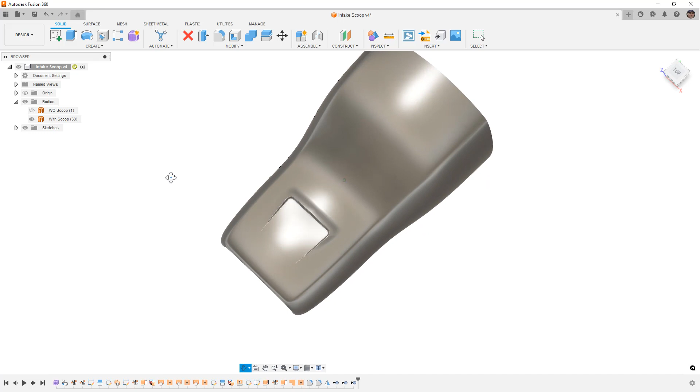There are a few things that we need to understand, some challenges that we're going to run into, but overall we want to talk about the process of creating this scoop, which takes the original geometry and creates a section that dips down into it as well as bumps up and away from it.

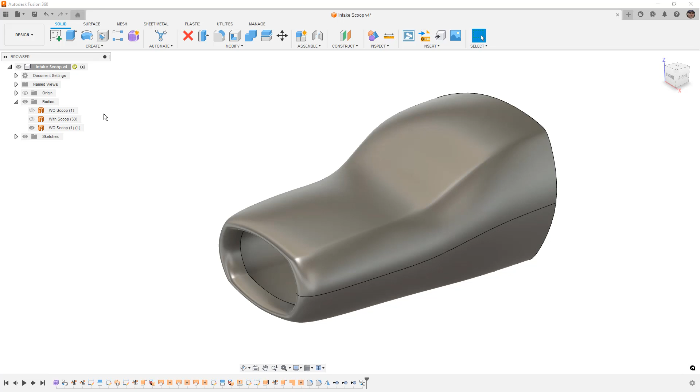For this example, I'm going to go to my surfacing tools and start with my trim tool. I'm going to use the XZ plane and trim away the bottom of the design. This is going to leave just the top.

The reason I do this is because now when we're doing things like trimming or splitting faces, it's not dealing with the top and the bottom of the surface. We're only dealing with the top.

Now, as I mentioned, generally I like to work with symmetry. However, that unfortunately is a problem with Fusion 360 because as we create lofts or patches and use tangency or curvature continuity, I've noticed there's an inconsistency in those internal surfaces.

So for this design, what we're going to do is work with the entire design, drawing half the sketch and mirroring the sketch rather than mirroring the surfaces.

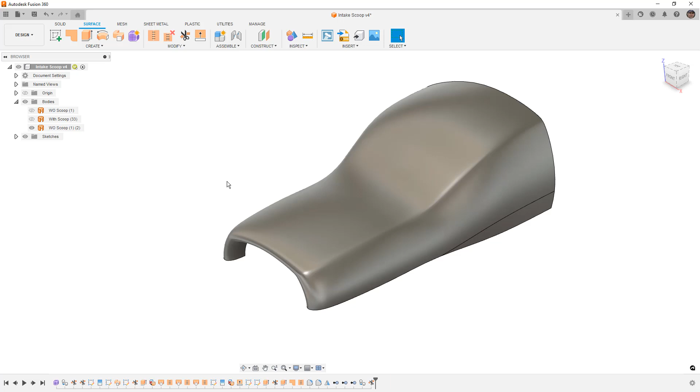To get started, we're going to go to our top plane and start our sketch. I'm going to use a line tool coming from the origin and up, then create a secondary line here, hit escape, and turn this one into construction using X on the keyboard.

Now what we're going to do is create a different version than the one I showed you here. We're going to make our own version, maybe with some slight differences, and try to get the best possible surface out of this.

So the first thing we need to decide or understand is whether we're going to use straight lines, or arcs, or splines, or something else. It's definitely much easier for us to use straight lines for this example, so that's what I'm going to do.

But note that curvature with straight lines is oftentimes tricky, so it might cause problems downstream to use all straight lines and fillets, but we're going to use that as the basis just to speed things along.

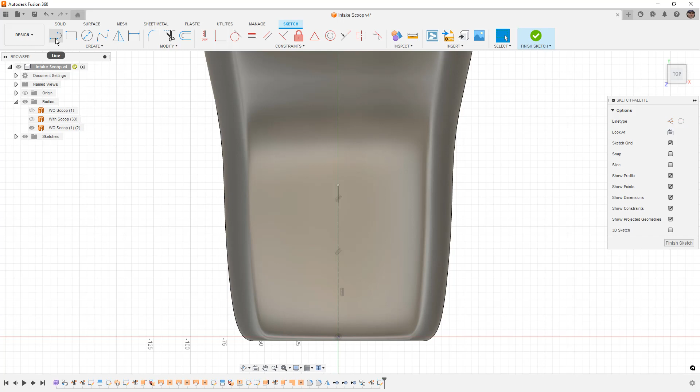So I'm going to draw out and to the left and begin creating the shape for my design. I'm going to make this horizontal, then come up and back over to here. I'll hit escape, and make sure this line is horizontal, making sure those two are parallel, and then we can begin to manipulate the shape however we need.

Now, another interesting thing that we need to think about is the fact that we don't necessarily want to come to a point right here.

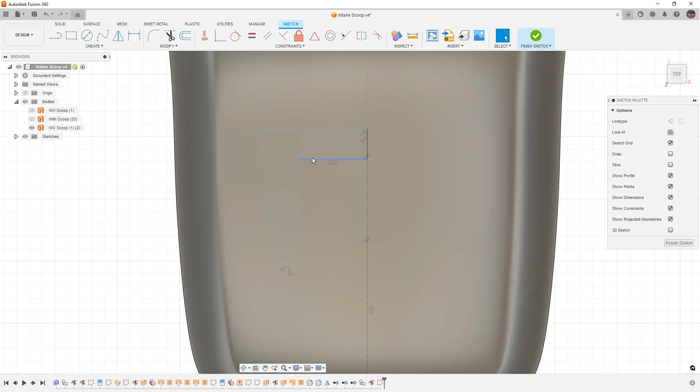That's going to cause problems when we try to blend surfaces together and create fillets. So oftentimes you'll see some of these things offset inward and outward. Because it can get tricky with our surface, I'm going to turn that off or hide it for now.

I'm going to go ahead and create a horizontal line here. This is going to allow us to split the inside section that we're going to be building, the section that goes down into our fuselage.

Before we get too much further, we want to round these corners off. Now we can do this with conics, which I've talked about before. I'm going to do this the simple way with fillets, not the ideal way. I'd generally use something a little better like a spline or a conic, but I'm trying to keep this as simple as possible without complicating it too much beyond the surfacing tools.

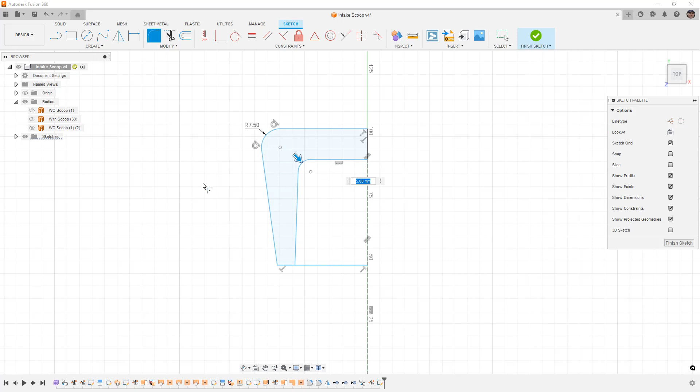Once we have those fillets, now we can use our mirror tool. We're going to select all the entities that we want to mirror, and we'll pick our mirror line. Now we've got essentially the outline of our intake, or our scoop.

So the next thing we're going to do is figure out where we want this to end up, because we're going to blend everything together.

I'm just going to come over a little bit, in and over horizontally. Then once again use my fillet, trying to keep these roughly concentric. We could go the extra step making both of these concentric, but it's really not that important at this point, honestly—we're just doing this visually. So as long as it looks okay, that's fine for what I want to do.

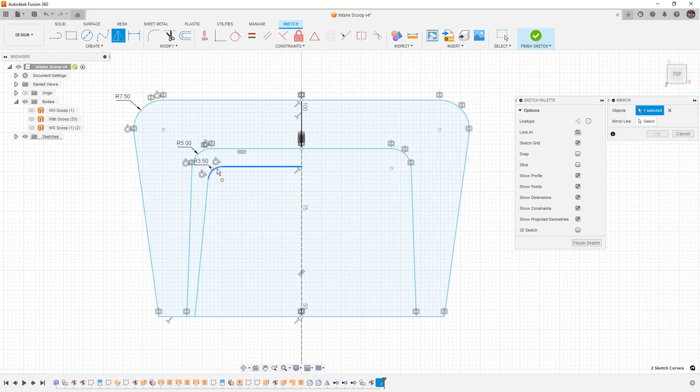Once again we'll just pick our center mirror line. This is going to represent the section that's bumped up and away from the current surface, and this is the section that is down and below. Then we need to build in between these curves.

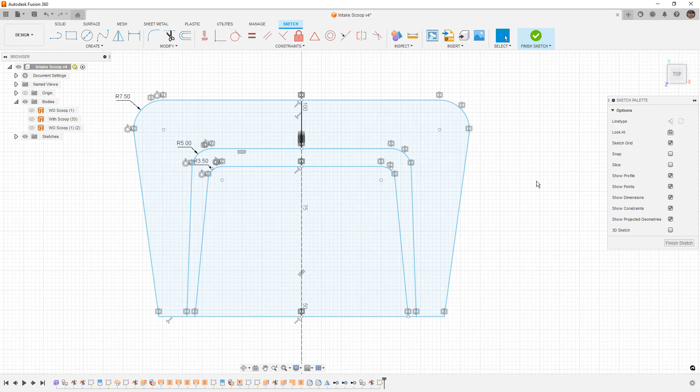This is an important step in the process, to figure out what you want your design to look like in 2D, whether it's from the side, the top, or the front. Having these references is really going to help.

The first thing I want to do is use this as a split tool to split the face. Now this is going to get a little tricky because of the number of references we have here, so we might need to hold down the Shift key and try to select multiples. You'll notice it's not allowing us to go across this midline and make that selection.

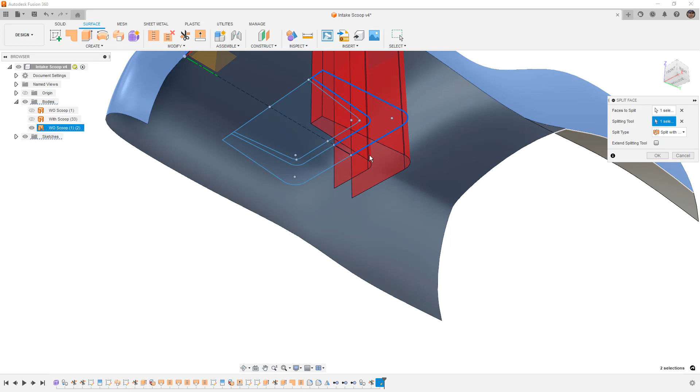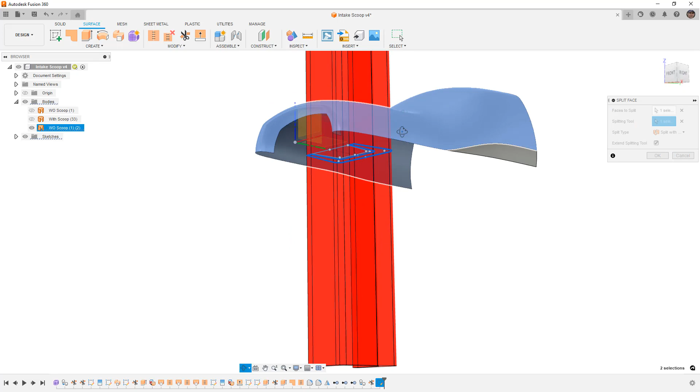If that's the case, let's turn off Extend Splitting Tool and see if it'll allow us to do it. If not, we should go back to our sketch, pick this line here, and turn that into construction as well. That allows us to carry on the tangency whenever we make those selections. For example, now we should be able to go around and make all these selections to get the full closed path. So if you find you're having trouble making those selections, go back and make adjustments to your sketch, and see if removing or changing some of the geometry to construction can help.

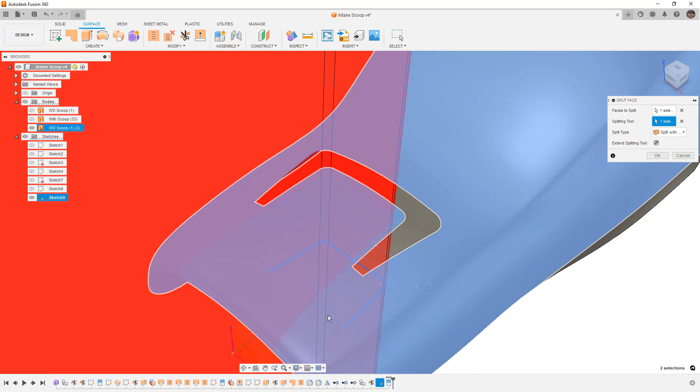The next thing I want to do is repeat that, splitting the inside. This time I want to use these inside curves, and I'm also going to try to carry this over. Let's see if we can make this selection.

This selection isn't going to work simply because we don't have that straight line. So I'm going to cancel the split tool and use these straight lines instead. The reason is because those straight lines will allow us to come all the way to here. Now, if it happens to cut the entire surface body, that doesn't necessarily mean there's a problem, but you can toggle off Extend. And because they do end at the same vertex on each side, it'll just stop at that point.

We're going to repeat this one more time: Modify, Split Face, split this inside face, and now our splitting tool is going to be these inside sections.

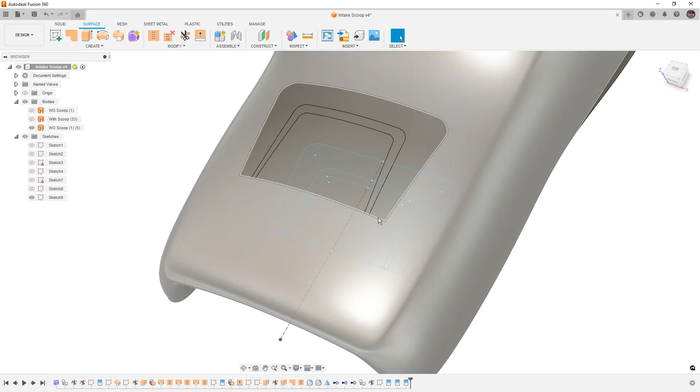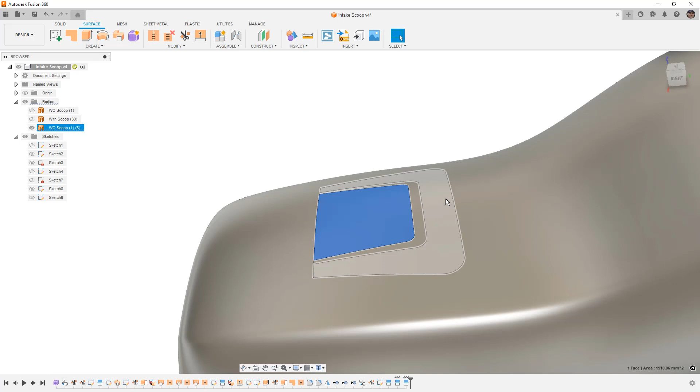Again, you can turn off Extend because all of the sketches intersect at the right places. Now this gets a little bit interesting, simply based on the fact that we need to go up from here and down from here, and these are just in between references. We're going to use these references when we build things out in 3D, and I'll get started by defining the section that is going to bump up from here.

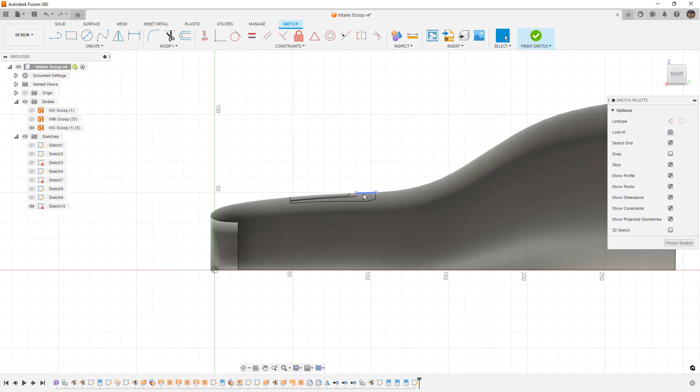To do that, we're going to create a sketch on our midplane here, and I'm going to use Slice, which will allow us to see through the surface. Because we don't have an edge here, we need to use Create, Project Include, and Intersect. We're going to intersect with that section of our sketch or surface, then use our Line tool to come up vertically, and then use a Spline tool to go from this endpoint to this one here.

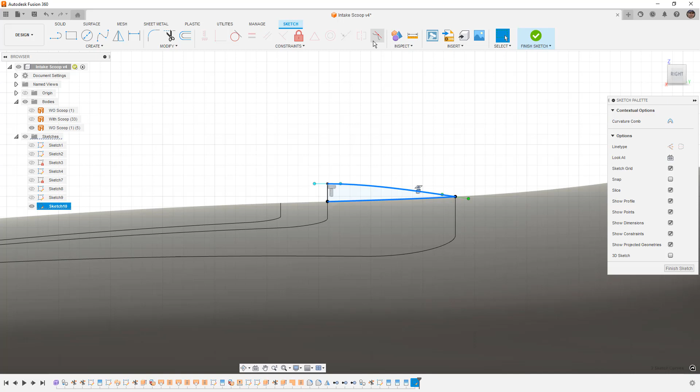From here, we need to talk about the differences between using tangency and curvature continuity. So we're going to make this one horizontal here, and bring it down. When we talk about these two entities, the intersection curve as well as our spline, we have the ability to add a G2 or curvature continuity, which adds a tangency direction to the handle, but also a weight based on the radius of curvature of our surrounding surface.

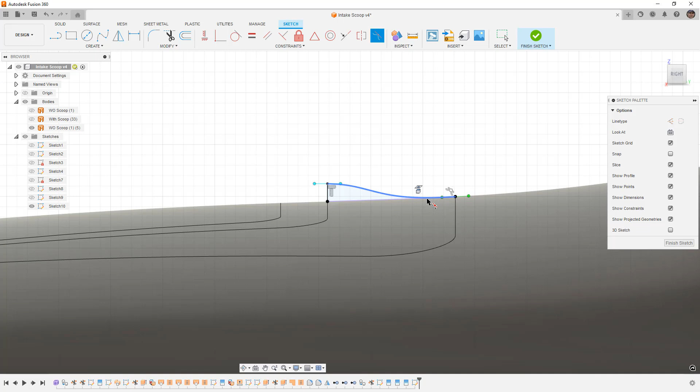If we just do a tangency, it's only going to pick the direction that the surface is going and not add a weight to it. So if we use curvature, it's potentially going to drive this a bit further forward because this radius right here is going to match the radius as it's coming into that point.

That's as much as we can do with Fusion. There's no G3 continuity because it's not really a Class A surfacing tool. So we can use G2, the curvature constraint, or G1, the tangent constraint. G0 would be our coincident constraint, which we have just by simply snapping to those endpoints.

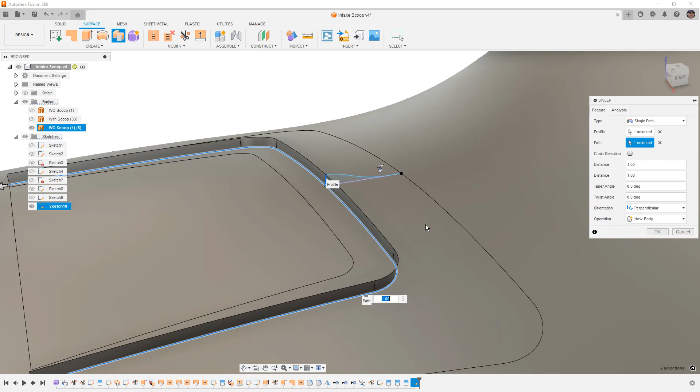So this sketch is going to be used to take this vertical line and we're going to sweep this around this path. Now, when we use sweep, there are a couple things we need to be aware of. The sweep tool does not have end conditions, so we can't drive it with tangency or curvature continuity.

So using a sweep as a surface tool actually produces a really nice surface, but it has to be done very early in your design. Because you can't drive it with tangency, you need to make sure you're careful with when you use it and how you use it.

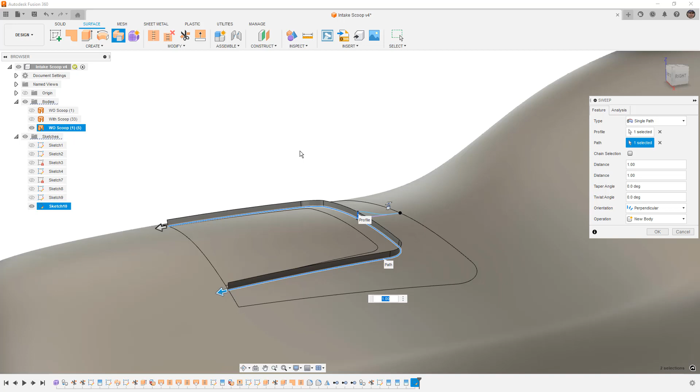In our case, it's fine simply because the curve we had was on the midline, basically our mirror or symmetry line for this body, which means the sweep is going out normal or perpendicular to that sketch plane. That's perfectly fine because we're on the mirror line. You can see there's no line in the middle of that sweep, so in our case, it works.

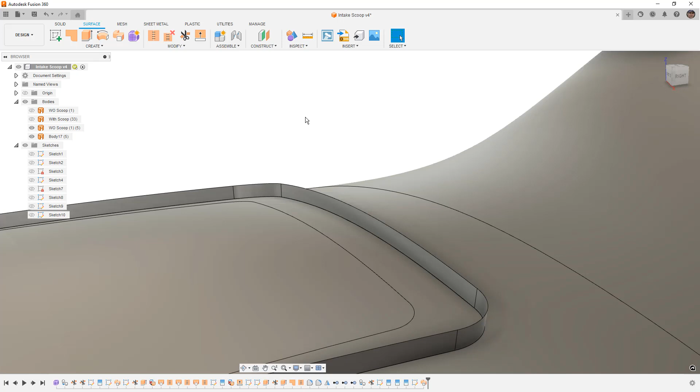Again, this is an early on kind of thing, something we want to do very early in our design. The next thing we need to do with the sweep is trim it so that it blends smoothly into this front edge.

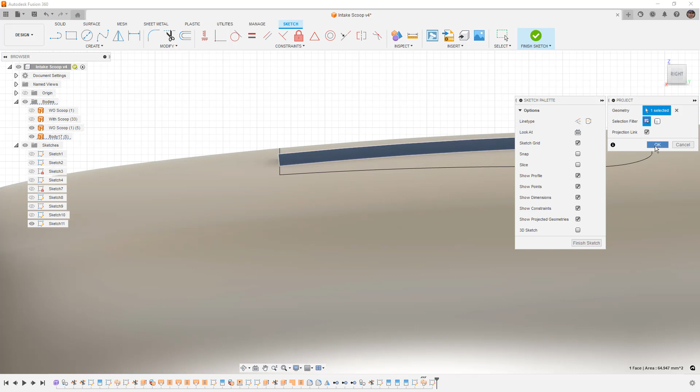And we're going to do that with a sketch, again on the side plane. I'm going to take this and hit P on the keyboard to project. Then we'll use a spline. I'm keeping everything relatively simple, not spending a lot of time defining these curves. I'm going to use tangency here and tangency at the top.

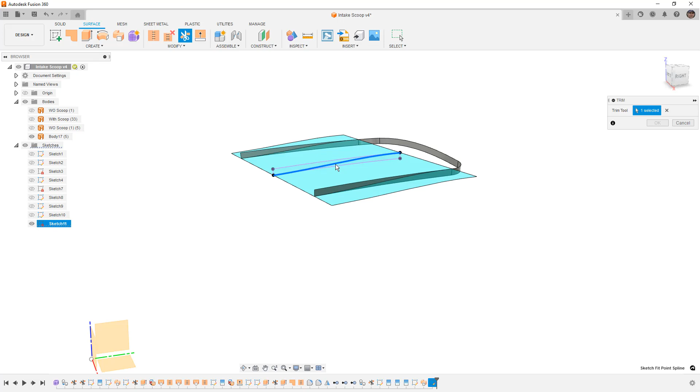Then we're going to hide the body without scoop just so we show our sweep only. We'll use our trim, select that spline we created, and get rid of the top section of both of those. Hide our sketch, and we'll bring our surface back.

So when we do this, essentially what we're doing is building out a cage or a control for how we want the shape to be built. Remember, we put that line in the center, we built out this curve here, and that's going to help us drive the shape.

So at this point, this is where things start to get a little bit tricky for us in defining these surfaces. We have a couple of tools that we can use.

We could use patch, we could use loft, and those are really the two main tools that we can use to build these. There are some problems with each of these. Loft can do a relatively good job. For example, if we're just lofting between here and here, and we're using this spline as a guide or an interior rail, that can produce a good result, especially if we start driving these using tangency.

But the place where Fusion starts to hang up on this is at these edges. Even if we change these from free edges to align to surface, what ends up happening is as we build out the rest of the surface with this tool, it really starts to hang up. And then the continuity that ends up happening in those corners is just not good surface.

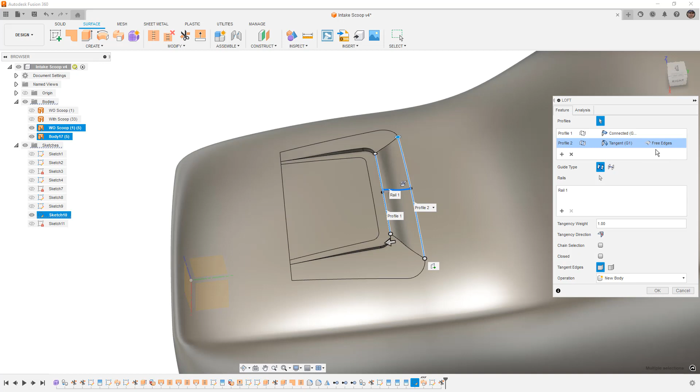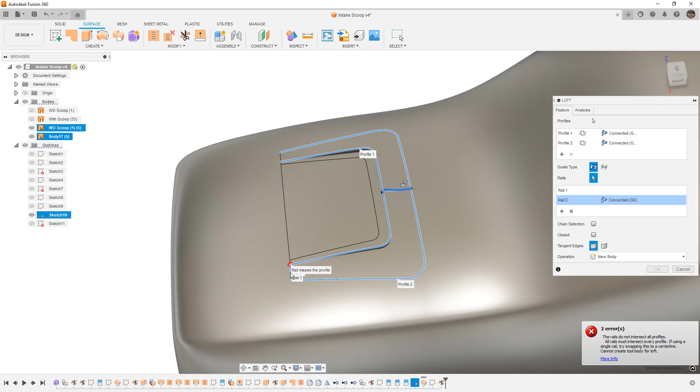So you might also be thinking to yourself, well, why don't we just drive this all the way around? We have 4 sides. We can just carry this all the way around. We'll add another profile. We'll do the same thing over here. It's going to give us some errors until we fill in the rest of it. Then we can use our rails at the end and we can drive the continuity.

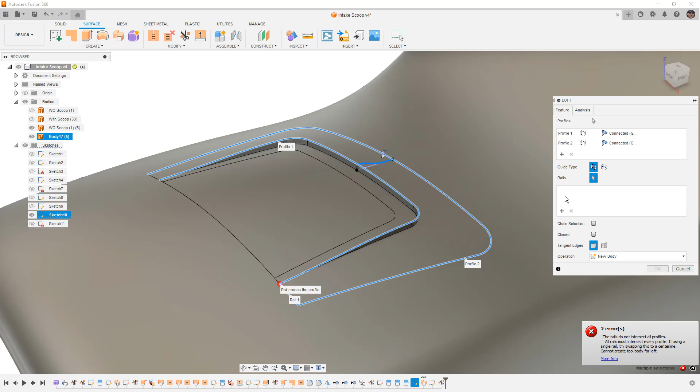But you can see we're starting to see some problems. Even though we trimmed that right to the end, it's looking like there is a slight discontinuity here from the trim and our surface. So that's going to cause a problem. Sometimes these minor disconnects or discontinuities can be fixed with a patch tool. In some cases, they can't be fixed, and we might just need to get rid of those rails, and that's perfectly fine. That might be a valid option.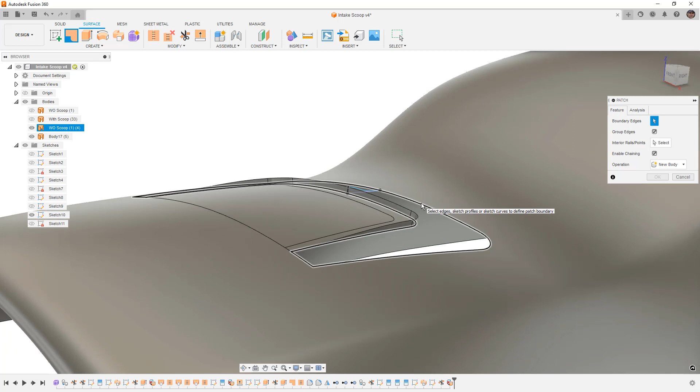However, I also have noticed that as the loft goes around this corner, it has a much harder time controlling that shape. So what we're going to do is we're going to select this face and hit delete. Then we're going to try to use the patch tool using enable chaining. And notice when we enable chaining, it's grabbing the bottom edge because we haven't stitched these together. So let's do a quick stitch, put those and these together.

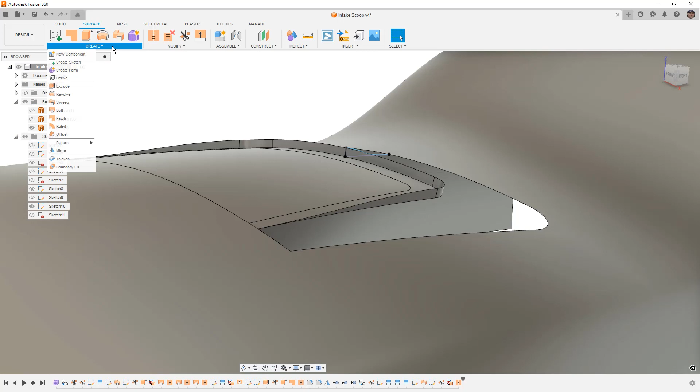And you'll notice that these green edges are going to represent essentially the areas where these two surfaces will be connected. Depending on the tolerance and the distance between those points, we might now have a single point and it might be a valid solution for a loft. So let's just give it a try real quick between these two edges. And let's select this. Now you can still see the rail is missing a point. If we zoom in really far, we might be able to grab it. But again, these are the sort of problems that we're going to run into.

So let's try to use a patch. And on the patch, we don't want to group the edges together. We do want to use an interior rail. And you'll notice when we do this, it automatically grabs the entire closed profile. It doesn't allow us to just grab that upper section, which is obviously problematic because we only want that upper section. So we need to kind of move the mouse around and see if it'll allow us to grab it. In this case, it doesn't, but that's probably okay because we're driving this based on curvature.

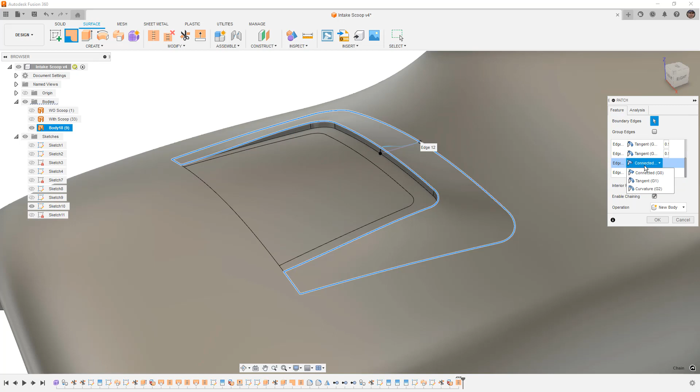However, we need to figure out which edges we can use tangency on. So as we move our way around, you can see each one is being shown on screen. Edge 3 will be connected, edge 4 will be connected, edge 5 connected, 6 connected, 7, 8. Once we get back around to 9, now we can drive this with tangency. 10, tangency. 11 is going to have tangency. 12, tangency. And 13, tangency.

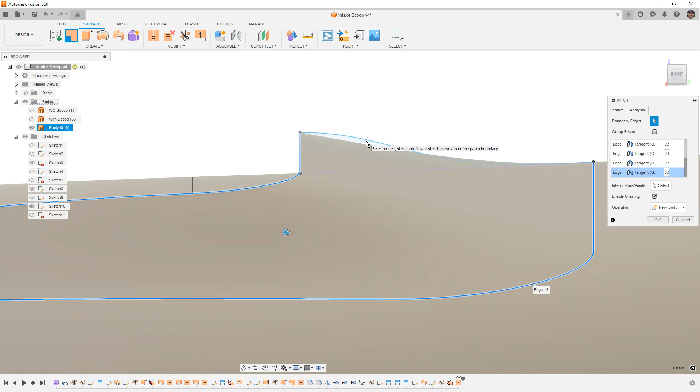So you can see we got a fairly smooth result. It's relatively close to the spline we created. The main difference is that our spline had a direction. So in this case, it actually had a horizontal direction. If that is a critical feature in your design, then we really just need to go back and recreate that sketch where this vertical edge here is either non-existent or its construction. Because it is kind of important to the design intent, I'm going to hit cancel. I'm going to create a new sketch.

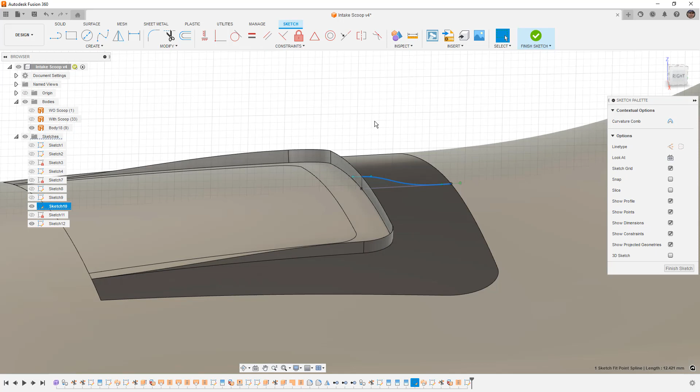And I am just going to project that into my current sketch. So just P on the keyboard, and then I can hide that original, finish the sketch, and I can repeat this process using patch. Now when we use this as our interior rail, it's the only one we can select. We're going to ungroup the edges, and we're going to move our way around, making each of these tangent, except for those interior ones, so edge 3, edge 4, let's just go down until we find edge 9,

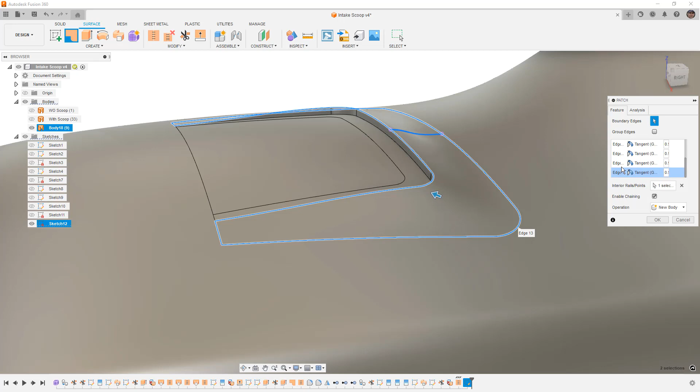10. Another thing to note is by default, when we're using patch, the edge weighting when we use tangent or curvature continuity is going to be set to 0.5, where the default for a loft is going to be set to 1. You can change that. It does get a little tricky when you're using patches, but you can change that. So overall, this looks okay. I can see a little bit of weird shading that's happening right in the middle. That could potentially cause a problem.

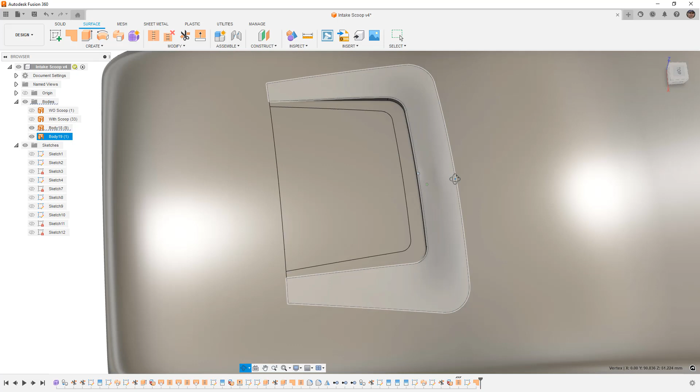You can see there is a vertex here. And part of the reason that vertex is there is because we had a sketch right there. Now, the surface itself doesn't have any splits in it, but that edge right there is introducing some problems into the surface. If we double click on this patch and we clear that midline and we say okay, it's a much smoother result because we're no longer using that to drive the curvature. So that's an important thing that we need to consider.

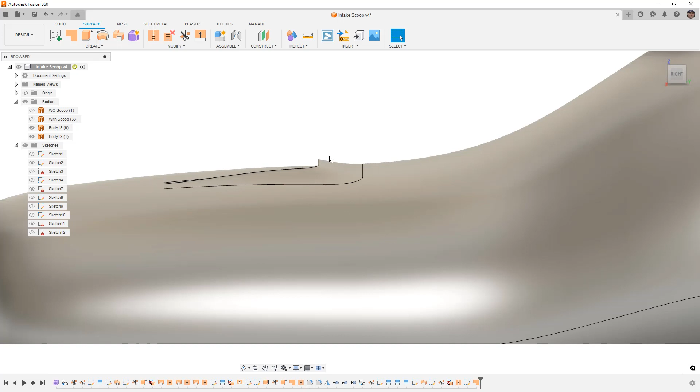Sometimes we need to make these choices or decisions based on the geometry that we're using. So in this case, I'm going to not use that guide, and I'm just going to allow it to sort of taper down a little bit instead of being horizontal there. Because I think that the continuity or the surface quality of the rest of this is much more important than having that little design element.

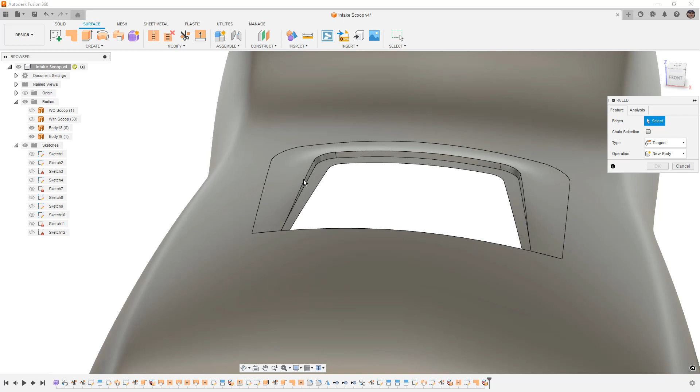The next thing that we need to do is we need to build the surface that's going down from here. So I'm going to delete that. And then I want to use my ruled surface tool. So we're going to come down and find ruled. I'm going to select these inside edges. And I'm going to have this go to a direction. Now the direction is going to be my top plane. And that will allow me to build these surfaces downward. So I'm going to add more edges.

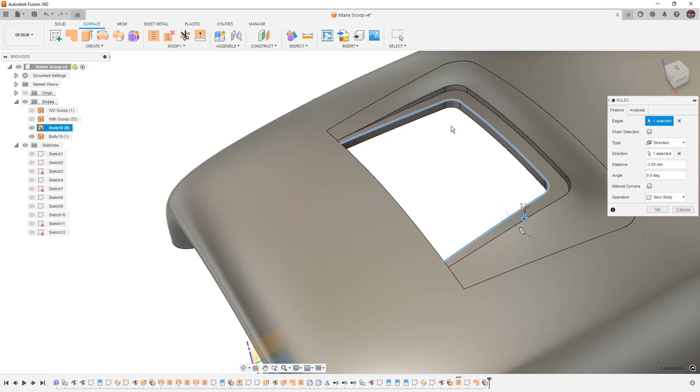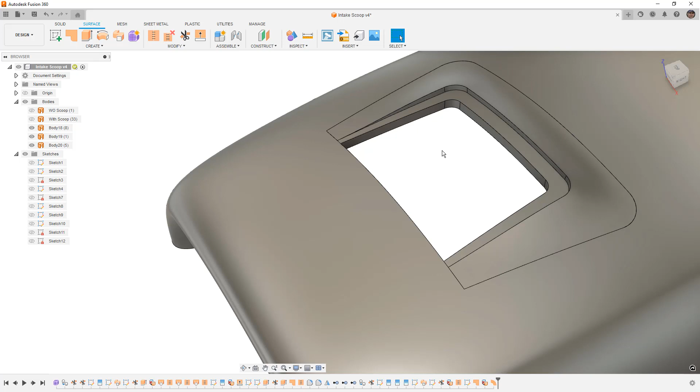And part of the reason I'm doing this is because I want this edge to go down to here. So we're going to say, okay, I want that edge to go down to give me a place for this to sort of live. Now I know that at this corner or this point here, that we're going to end up trimming it back, but we need to figure out a way to blend everything together and get down to that point. So I'm using these edges that we created by splitting things up, using tools like ruled or extend, and allowing us to build out our 3D references relatively easily.

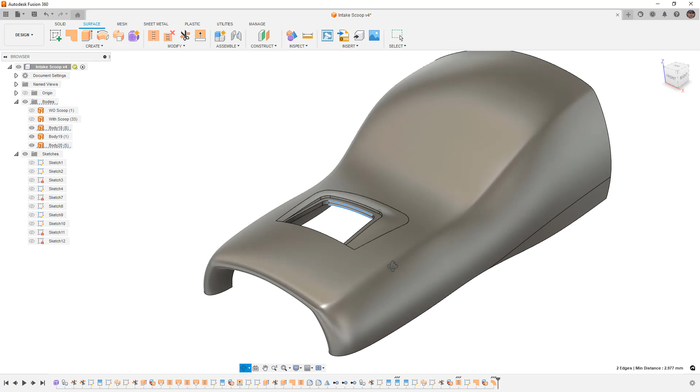Now, part of the reason we did that is because this edge and this edge are offsets of each other, which means that they're nice and consistent width. If we were just to manually push it down, it would likely be flat. And you can see that these match the shape of the rest of the chassis or the fuselage. So let's do another sketch from the side. Let's use slice in our sketch. And we're going to project this inside face, so P on the keyboard.

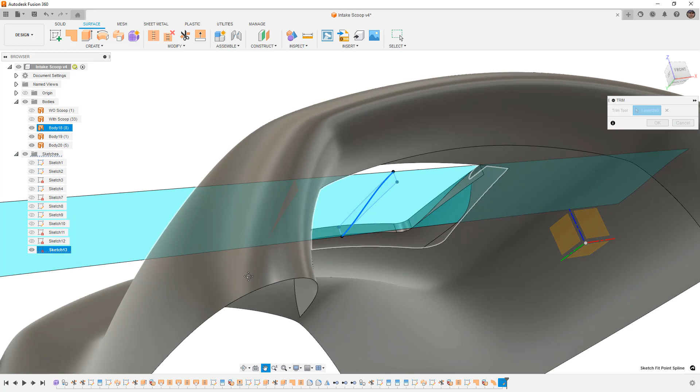And then I also want to use create, actually, you know what? Let's just create a spline here and let's see how this looks. So we'll go from up here to down here. We'll add tangency at the top and tangency at the bottom. And we'll finish the sketch. So what we're going to be doing with that is trimming. Once more, we're going to select that as our trim tool. We'll rotate it around to the bottom, get rid of that little piece, bring this back down, get rid of that little piece, and we'll say OK.

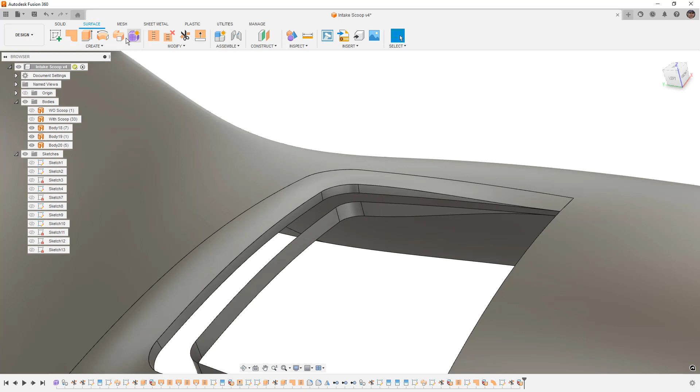So this is going to be essentially a sacrificial surface. It's just temporary because we don't actually need this one here. We can delete that and get rid of it. Because of the split, we're automatically going to have a little bit of an edge there. But what we want to do is we want to build from here down into here. And we can do that with the patch tool. We don't want to use enable chaining.

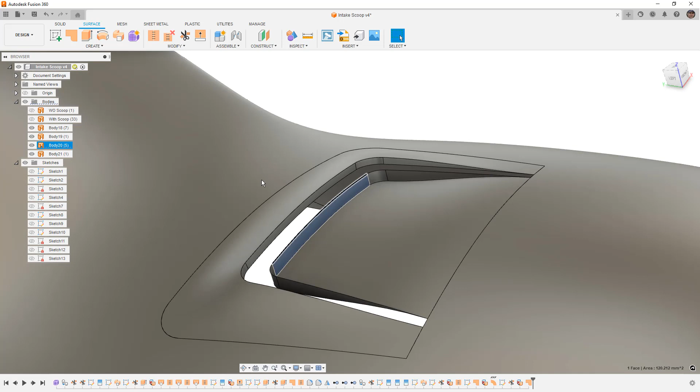We want to manually select these edges, if it'll let us, and work our way around to the bottom. And then edge 4, we're going to have tangency. And then all the rest of the edges, we're going to just allow it to connect. So this surface, we don't need anymore, but this is essentially where we're going down to. And then we're going to fill in the gaps between these. So I'm going to stitch these together for now.

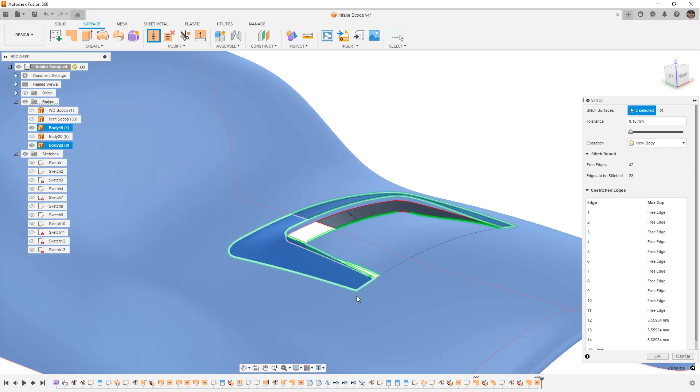Now, you will notice that this is green for some reason. I don't know why. Let's see what happens when I hit OK. Looks OK. Those are all connected. That is another surface piece. I do need to include that in my stitch. We should have a single surface body.

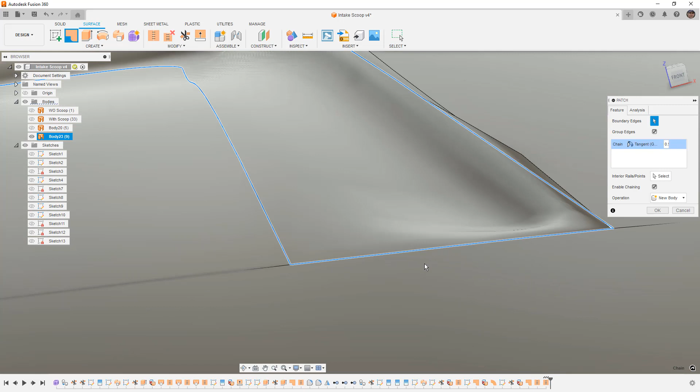So now we can try to use our patch tool. I'm going to enable chaining again, and I'm going to group all the edges together. I'm going to see if I can drive this with tangency. It's probably going to fail, but it actually doesn't look too bad. I don't really like what's going on here at this corner, but overall it doesn't look horrible. But I'm not really sold on it either.

So I'm going to do connected. I'm going to say OK. And part of the reason I'm doing connected is because that'll give me a nice, good quality surface, and then I can blend things after the fact. So part of the reason we're having trouble is because everything is coming down to a point over here, and that point is essentially just causing us problems. Another thing that we could do is we can get rid of these faces. I know we stitched them together, but we could get rid of those.

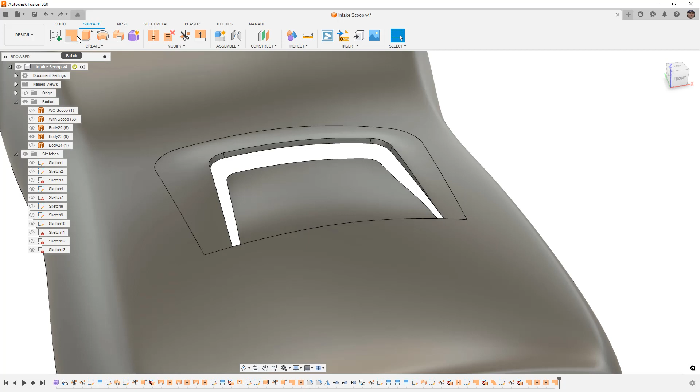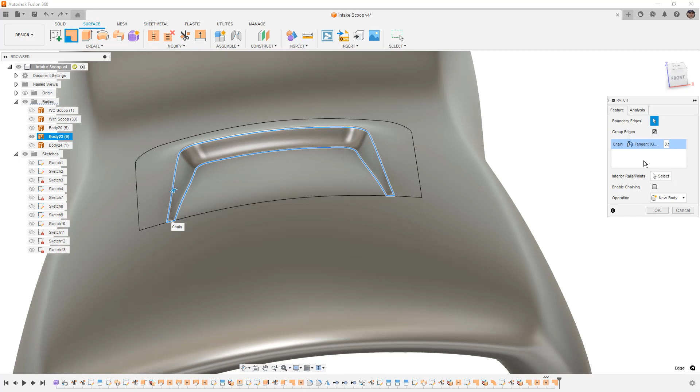And actually, you know what? Control Z. Let's undo that. Here's what we're going to do. We are going to turn off enable chaining. We're going to work our way around this design. We're going to select these small pieces, but we want to go over the top of this. Part of the reason we want to go over the top of this is because we'll be able to drive the tangency at the top. Let's see if this works. Cross our fingers. All right, so these ones at the top are going the wrong direction, so that's not actually going to work for us.

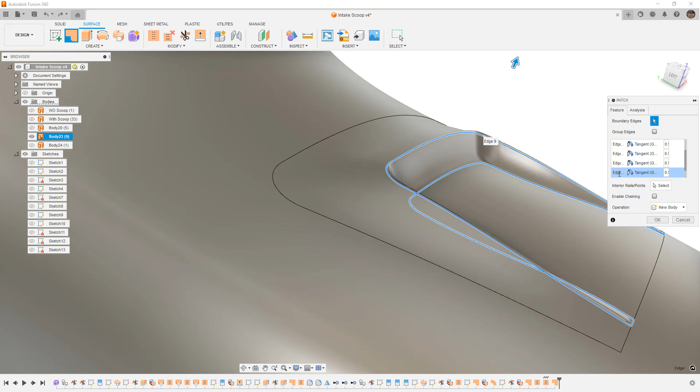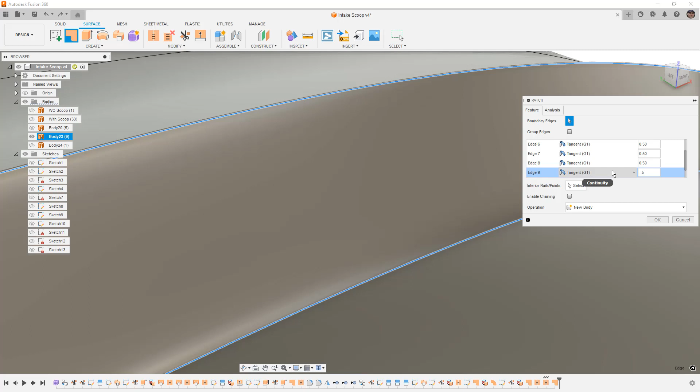So we have to ungroup the edges, and we need to find those edges. So let's find the edges at the top. I think edge 4 is at the bottom. Let's see, edge 5, 6, 7, 8, 9. And we want to switch the direction on that one. So just basically pull that edge down. So this dialog box, let's see if we can get this a little bit bigger. Let's try minus 0.5. It does not like that.

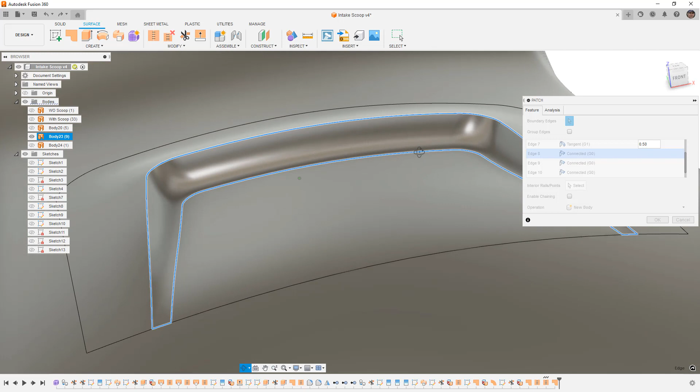I'm going to make this one connected for now. I'm going to make the next one connected. And just working around. Let's see, this one here will be connected as well. So we're driving tangency off of, let's see, edge 7 is at the front. And everything else looks pretty good. Let's go down here. That one's okay. So I'm going to say okay to that. I think that looks okay.

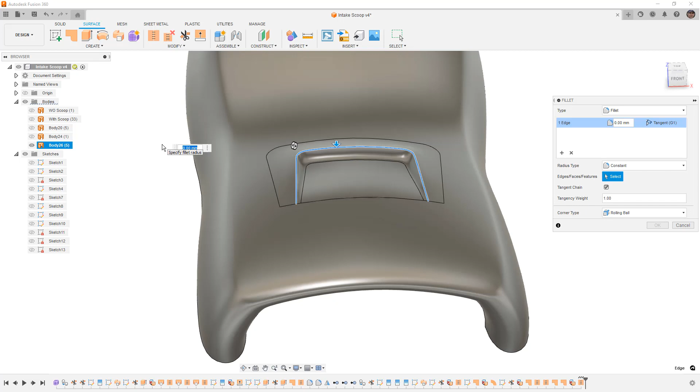Now we need to hide that, and we need to delete or get rid of all these extra faces in here. We don't want to leave those in there. Just hit delete. And now what we're left with is that nice smooth transition. It's a bit sharper on the outside. I'm going to go ahead and stitch those together. And that gives us a pretty decent result. I'm going to try, which probably won't work, but I'm going to try to fillet this. Yeah, I didn't think that was going to work.

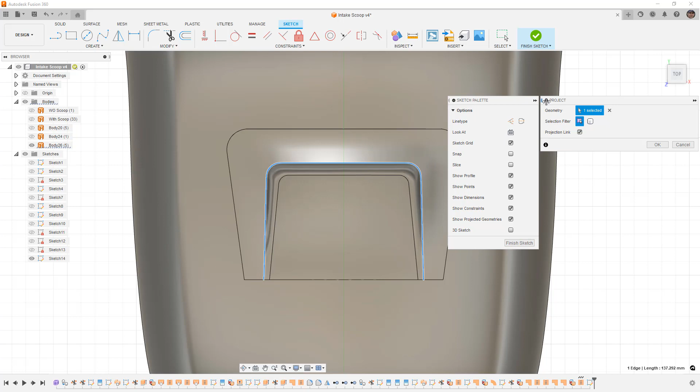Okay. So one of the ways that we can blend this together now is, again, another sketch. We're going to go to the top. And keep in mind that we are doing this essentially together. This is different than the one I created for the data set. So we're exploring these options and figuring out what works and what doesn't. So what I have here, God, that is horrible. Let's drag that back. So what I have here is a projected edge.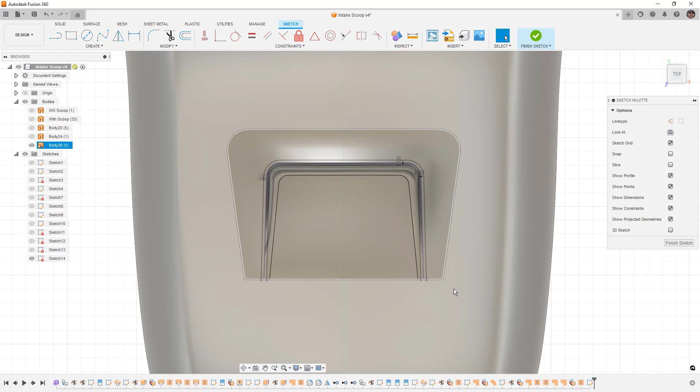Then I'm going to take that and I'm going to offset it. I'll go 1 millimeter and we'll offset, well, why does that? We're going to offset that one the other direction. And because this down here was horizontal, these vertices will be on that edge, so that'll be fine. And we can use these as trim tools or split tools. So we're going to do a split face, and this is going to be our tool.

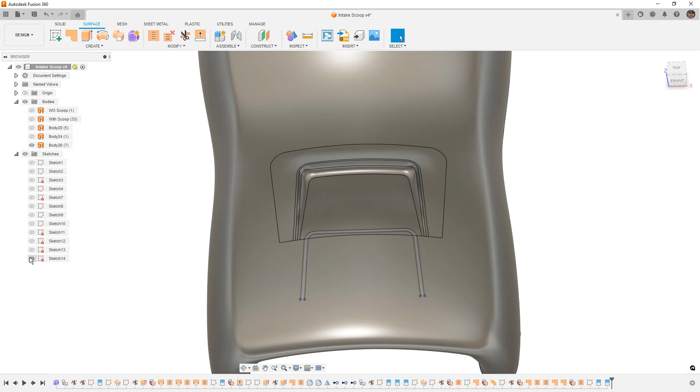And we'll bring that sketch back. We'll repeat it. We're going to split the inside now. We'll use the inside offset. And now what we're going to do is we can get rid of those faces. Just select them and delete them. Now, theoretically, if this works, we'll enable chaining. We will group all the edges. And we'll make them tangent.

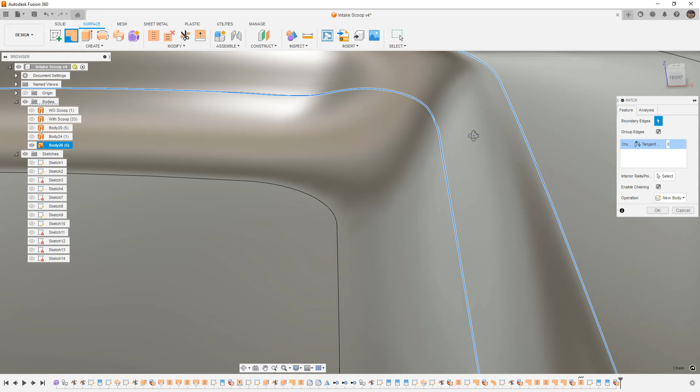So what should happen, theoretically, and we'll have to zoom in a little bit, is at the top, we should be smoothly blending down to this edge. If we rotate it around to the side, should be true here as well. Should be smoothly blending down between those. So we'll say OK. We'll stitch them together. And now the end result is somewhat smooth. Control 4, hide the edges, and that looks pretty good.

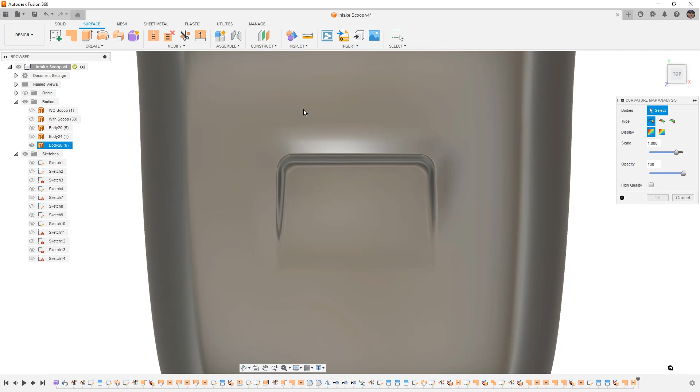So the main reason that we had to jump through so many hoops was to make sure that the transitions between all these surfaces were good. And the final test of this is for us to take a look at our curvature map analysis and our zebra stripes. Now, I'm going to turn on high quality. I'm going to drag this down. And what we want to see is that the transition in curvature doesn't have any major discontinuities like it does here. Now that to me is not great.

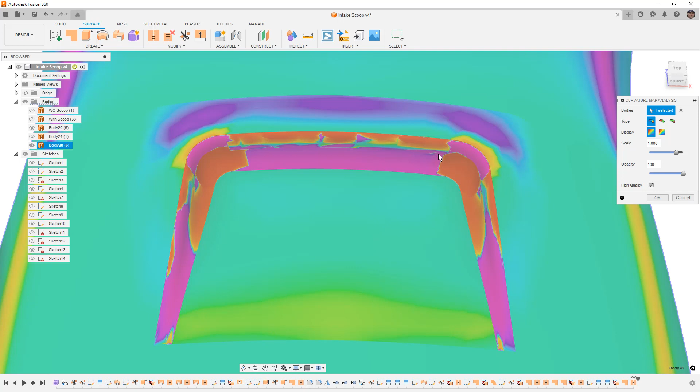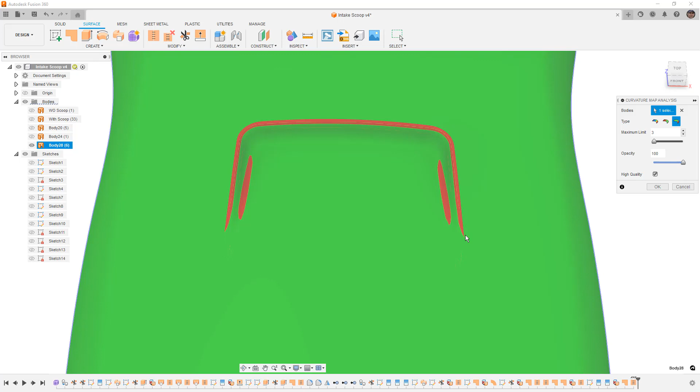However, the consistency around the outside where we have the larger transitions and surfaces, those are quite a bit better. This area down here, I don't really like what's going on there, but I am going to take this one as a win. I also want to take a look at the principal max. I'm going to reduce this down to, let's say, 3 millimeters. Let's go to 3. Now what I'm seeing here is that the fillet or the radius in those corners are fairly consistent all the way around, and it's fairly consistent down here.

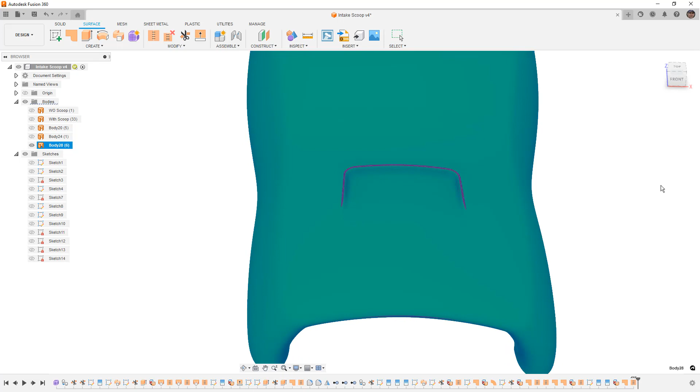If I go up to, let's say 4, they're starting to come into those corners. 5, we're starting to see it connected. If I go down to 2, then I'm just seeing it on that upper edge here. So I'm pretty happy with those results. I think that looks pretty good. So again, I'm going to take that as a win. In the analysis folder, I also want to go in and take a look at my zebra stripes, which might be a bad idea, but let's go ahead and just take a look.

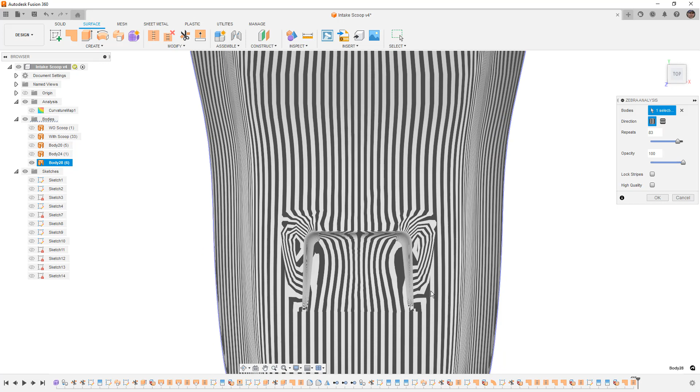So when I take a look at the zebra stripes, what I want to see is the transitions to be relatively smooth. And in the corners, you can see there's a little bit of a jump right there between black and white. And we saw that when we were looking at the curvature map analysis. It's an area of concern. This stuff up here, where it starts to drift to the side and come back, we also saw some curvature anomalies in there. We can see those as those sort of jumps or discontinuities in those lines.

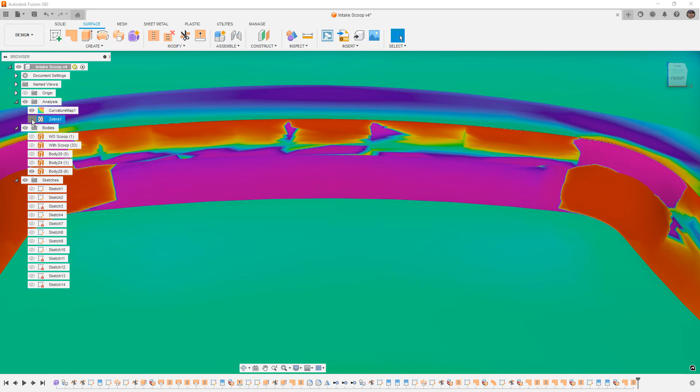So if we compare that to, let's say, curvature map analysis on the Gaussian, you can see right there how there's this sort of color jump that's happening. Now, if we switch between that and the zebra stripe, we can see that as well in the zebra stripe. And these are generally things that we would want to avoid. We don't really want to have those. But the surface quality here is probably as good as we're going to get with something like this.

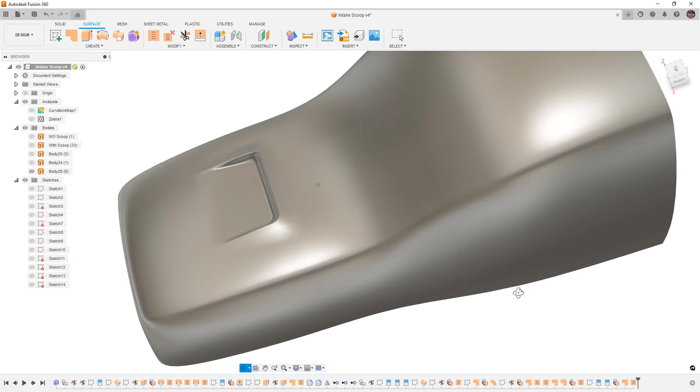So I know that was a 30-minute roundabout way to get to this end result, but I think overall, when you start working with surface tools in Fusion 360, you're going to have to find some of these workarounds. At least currently, the surface tools have a tendency to produce some less than ideal results in some cases. So make sure that you do check things like the zebra stripes and the curvature map analysis, and also just rotate these things around.

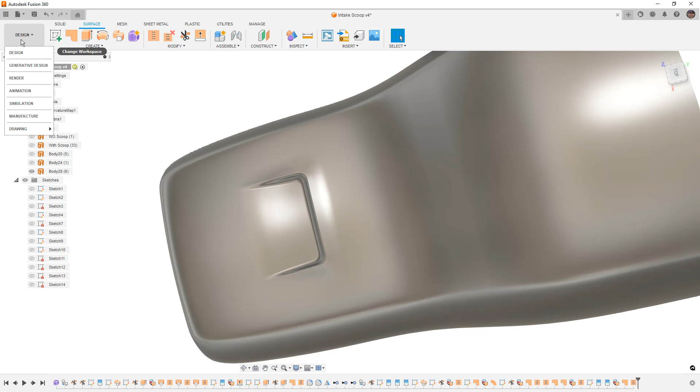Take a look at them in the render workspace and just see if you can identify any potential problems just by looking at the way that the lighting and the shadows are hitting your design. It can be a really good indication that you have a good set of surfaces or you potentially have something that you need to address. Overall, I'm pretty happy with this.